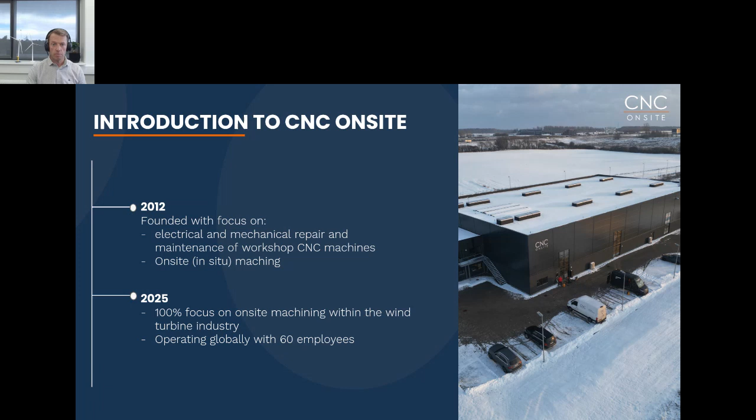So to some of the challenges, what we see is that turbines are getting larger and larger. So we have higher downtime costs due to lost production. We have higher vessel costs. We have larger components, so to replace a component becomes more expensive. And larger components also means higher tool costs, lifting equipment, everything related to bolting, and so on. And the bigger the component gets, the more dangerous it also becomes handling them. So in terms of HSE, there are also challenges that are increasing.

Then there is a push for longer lifetime, where the turbines years back were designed for 20 years. It's now more 25, 30, 35 years. And of course, with offshore, the interest of running the assets as long as possible is high due to the cost of building the offshore wind farm. There's also the use of FEA tools that is pushing the components closer to their design limits to reduce OPEX. And it means that you have lower design reserve factors, and especially for those older turbines that were maybe designed for 20 years lifetime, you will of course see more wear on these, especially if you want to lifetime extend.

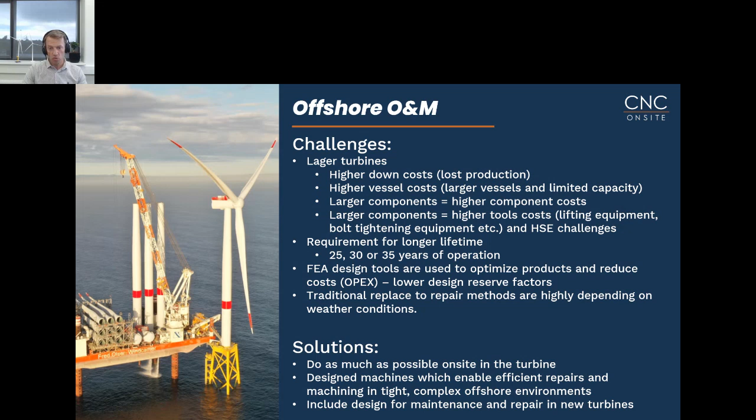And then you can say the traditional replace and repair methods are also highly dependent on weather conditions. And with the cost we see on the turbines, the vessels, everything, and also with the CO2 footprint, if you can repair instead of replace, it has a lot of benefits. So what we suggest is do as much as possible on site in the turbine. This requires machines that are designed to enable this efficient repair on site, especially for the existing fleet, the legacy fleet. This was not necessarily considered in the design, so that requires that you do a lot of designing to fit the machine into the space that is available. On new designs, it could be beneficial to include some of these methods and consider on-site machining, on-site repair in the design phase to improve your O&M going forward.

One of the examples I've taken here is the possibility to obtain maintenance-free bolts. Tightening and retightening of bolts in the large mechanical joints is relatively time-consuming. It's also therefore relatively expensive, and it's hard work with the bolts getting bigger and bigger, now passing M72 and on some of the new designs going to M90, M100. Just lifting the nut is a hassle, and the torque tools and so on are becoming extremely heavy and expensive. So one of the solutions of getting rid of that work is basically if you can ensure that your connection has sufficiently flat flanges and that you are in control of your bolt tightening process.

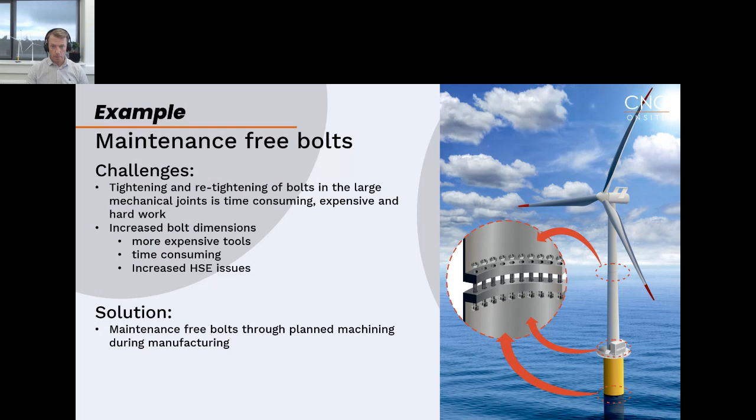And one way of ensuring that these flanges are flat enough is to implement flange machining during manufacturing. So what we are showcasing here is a project we've done together with Vestas. They have implemented flange machining on their bottom flanges on the towers, and they have now machined... The numbers I have here are from 23 flanges.

So there's a lot of details on the left side, but what you can see is that the global waviness has an average of 0.27, with a worst case being 0.6 millimeters of global flatness, and the best case 0.08, which is nearly next to impossible to measure, but it's a very stable process.

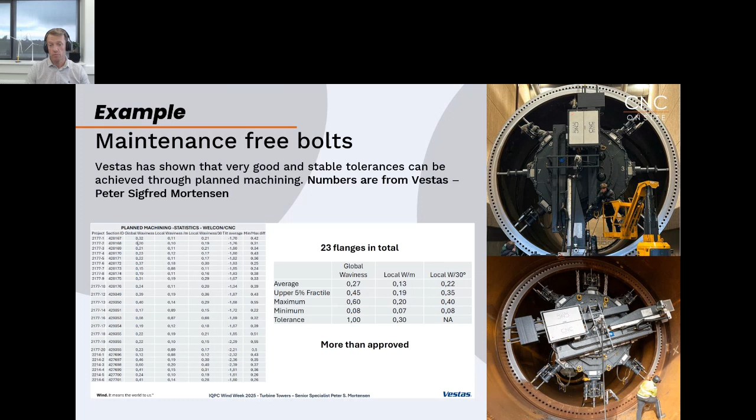And some of the benefits you gain from this in terms of production is that you have no heat tempering on the flanges if they are out of tolerance. You don't have any intermediate measurements between your manufacturing steps. Normally, you would then measure the flange. If it's out of tolerance, you would have to heat straighten it, do a new measurement, and sometimes it's necessary to repeat that process multiple times.

So you get a more planned process in your manufacturing, and basically a higher line throughput. So time savings on reduced measurements, less documentation, and you don't need to do any flange matching between your towers and transition pieces or monopiles, depending on if you are using a TP or a TP-less design. And in terms of operations, there's huge cost savings on not having to retighten bolts.

But as you can see, if you want to obtain these maintenance-free bolts, it's something that requires you to consider that already in the design phase. So it's important to get some of these cost savings on the O&M. It can be necessary to step quite far back in the design process, the manufacturing process, to allow you to gain these cost savings at a later stage. So this is one example of where you have to consider that in your design.

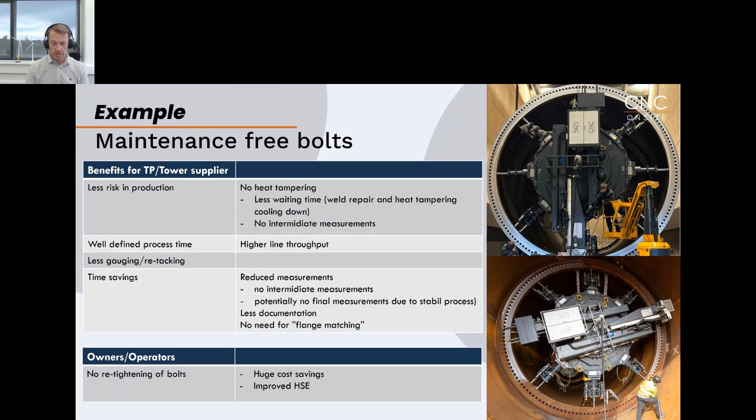Another example is on turbines that are up and running. I think one of the components that most people can relate to is the yaw ring. The yaw ring of the turbine can wear or it can break due to different reasons. But the yaw ring is probably the most challenging component to exchange. If you want to exchange the yaw ring, it requires a complete nacelle disassembly. So taking down the blades, taking the hub off, and lifting the nacelle at least to the deck of an installation vessel. And that is, of course, extremely expensive.

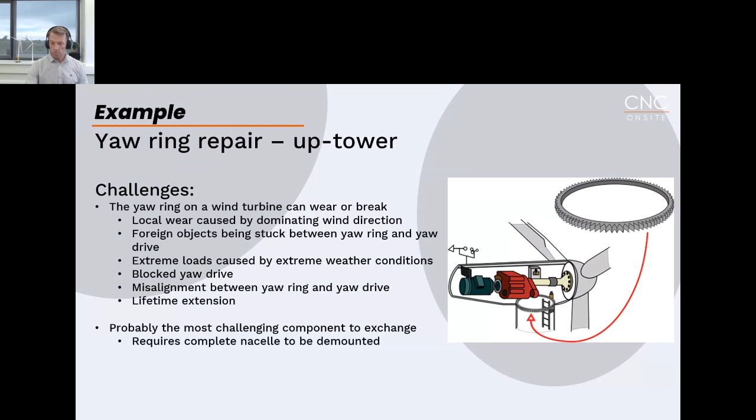But it is possible to make these repairs up tower. There are different possibilities. One possibility is to weld the teeth. That can be a good solution if you have smaller damages, cracks, or chip offs on your teeth. It can be your only alternative if there is no machining solution. But if a machining solution is available, it is normally ideal for larger repairs. So it can be either a number of smaller repairs on multiple teeth next to each other, or larger damages to one or multiple teeth where machining has its benefits compared to welding.

The main differences between the two processes is that welding is relatively fast to get up and get started. It takes a bit more time to get a machine in and get it set up, but the process time is relatively slower on welding, and you have a manual grinding process, which makes it more difficult to get a good contact surface on the yaw ring. Once it's been welded, you have to grind it, and if you do not get an even contact surface, you will have some very high local forces on your yaw ring, and that can cause it to break again relatively fast.

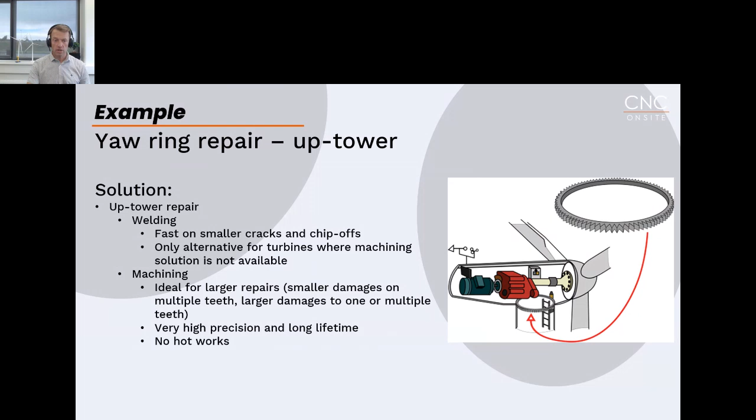As a rule of thumb, if you need to repair one complete tooth, it takes about 1 day. And with our machining solution, we can repair a segment which consists of 6 teeth in 1 day. So if you have multiple damages next to each other, the machining is faster. If you only have a small chip off on one tooth, it's faster to weld it. So you should always look at your damages and then evaluate which repair solution is the best for each case.

And then we bring a prefabricated segment that has the exact shape of the original yaw ring. The pocket and the segment combined have a slight press fit. So the segment is either slightly pre-bent or it's frozen down to allow the mounting. And once it's mounted in that pocket, it's held in place by bolts as well. And if you have more than 6 teeth that are damaged, you can do consecutive repairs, just installing more segments.

So the benefits of being able to do this up tower is, of course, you have no disassembly of the turbine. You don't need any cranes. Everything can be handled with the internal crane of the turbine. So you reduce your downtime. You are less dependent on weather conditions. We are working in the nacelle, so this can be done at higher wind speeds than component exchanges can be done.

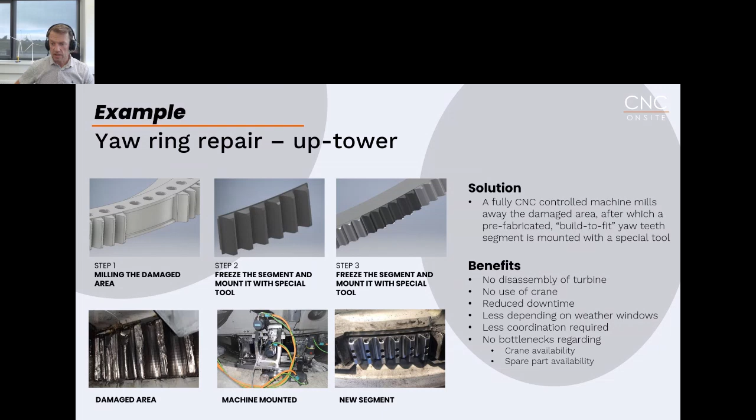There's of course a lot less coordination required if you can call a team who can go and do the repair on site, instead of having to organize exchange components, jack-up vessels, lifting gear, and all of that stuff. That's of course a huge time saver in coordination and all of these different things. And you have fewer bottlenecks in terms of crane availability, staffing, spare part availability, and stuff like that.

And there are a lot of other examples of what you can do up tower. It could be the sliding surface of the yaw ring. It could be the mounting surface of the yaw gear, rotor locks, brake discs, shafts. You can do external shaft turning. You can do internal shaft machining. You can repair teeth on pitch bearings. You can do broken bolts. It can be torque arms on gearboxes, and a lot of stuff that can actually be repaired on site instead of taking the components down and moving them to a workshop.

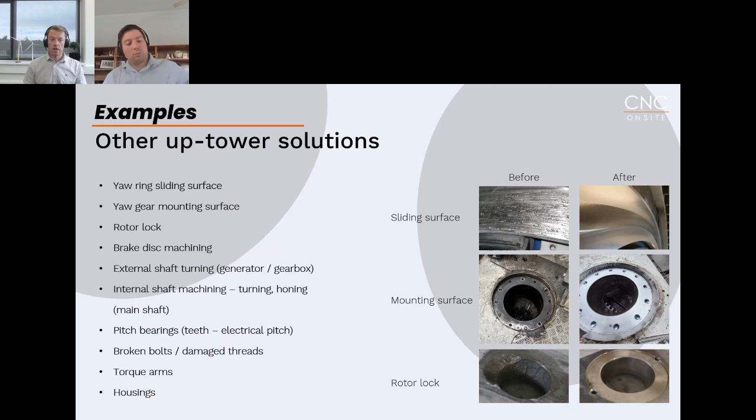So basically, we can go by CTV, and we can lift the equipment from a CTV or similar transport vessel to the foundation with the davit crane. So everything is small enough to be handled by the on-site cranes that are already in the offshore turbine. So the davit crane, and from the platform to the turbine, we use the internal crane of the turbine.

So everything is down in smaller components that can be handled, and they can also be moved around within the nacelle with the internal crane systems that are available in turbines. So all the equipment is designed for that. So that is of course a huge logistical benefit if you can do the repair on site instead.

Great. And sure, again, you touched on it a bit, and it depends on the technology that you use to repair. But how do you ensure that the on-site repairs maintain the same quality and quality assurance as a factory or shore-based repair? Yeah.

If we take the yaw ring as an example, the benefit of machining is that we have a CNC controlled machine. So when we machine the pocket in the yaw ring, we do that within a few hundredths of a millimeter tolerance, and we bring the segments prefabricated, so they are manufactured on workshop machines, typically 5-axis CNC machines. So they come with extremely fine tolerances corresponding to the tolerances of the original yaw ring.